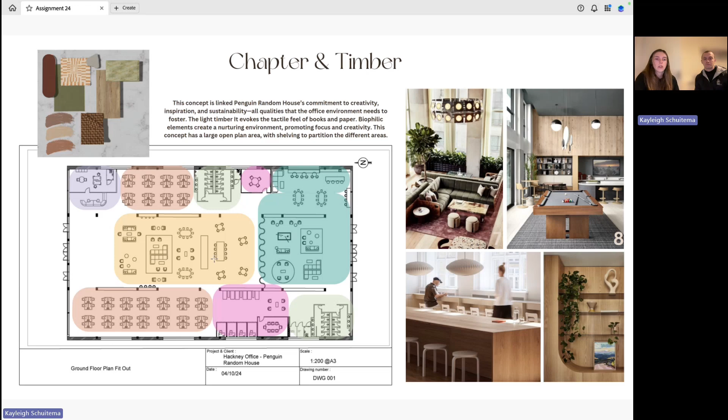Here you'll see the floor plan, and we've zoned it into different colors, making it really easy to identify what is what. We've got quite a few different areas. We've got a lot of desks, which you'll see in the orange zones. This is for sort of individual working. Obviously, we know that the office is not at full capacity all the time, but this is handy to have for people that do like to sit at a desk and work, and have a little bit more stability.

As you come through the entrance, you've got quite a big area of more comfortable lower seating, different groups. This provides different areas for people to work. You've got reception desk and back of house in the purple zone. You've got obviously two big groups of your WCs, some storage cupboards as well. You have got meeting rooms. So we've got two meeting rooms, one over here in the pink and the other one at the bottom.

You've got some working booths as well as some Zoom booths. So this provides really great acoustics. So for people who want to take phone calls or have a little private conversation, they can go into these, as well as the meeting rooms will be more fitted with acoustics for sound quality.

Then this big sort of turquoise square here would be your canteen area, as well as a little recreational zone. We thought this might be nice, as Penguin Random House really wants to foster teamwork and collaboration. We thought this would be a nice area to get people involved with each other, sort of on lunch breaks, etc. And we've divided this with the curtain so that you can obviously block it off, avoid sound, etc.

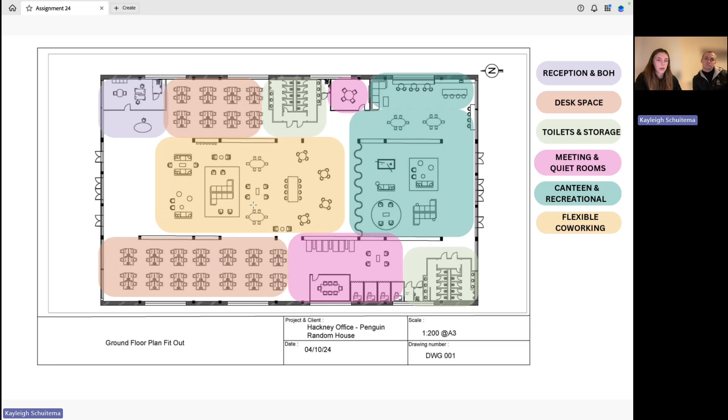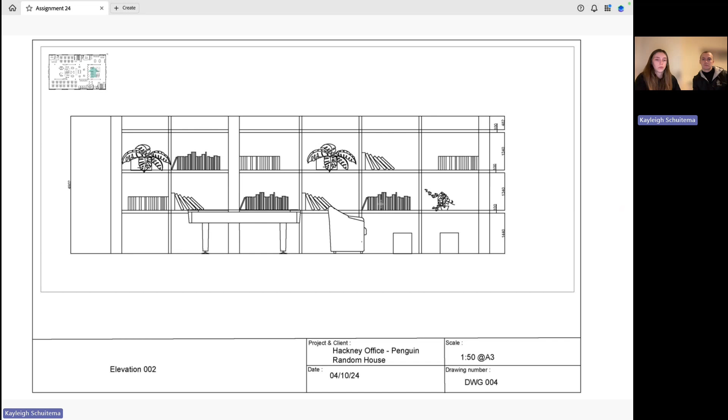This is just an elevation of one of your spaces. Here you'll see your pool table. We've created these really nice shelves out of the existing podiums here. And within these shelves, they're just a nice space to accessorize, put some plants, books, maybe awards, trophies, or sort of prints, whatever you like. These shelves create a really homely feel within them.

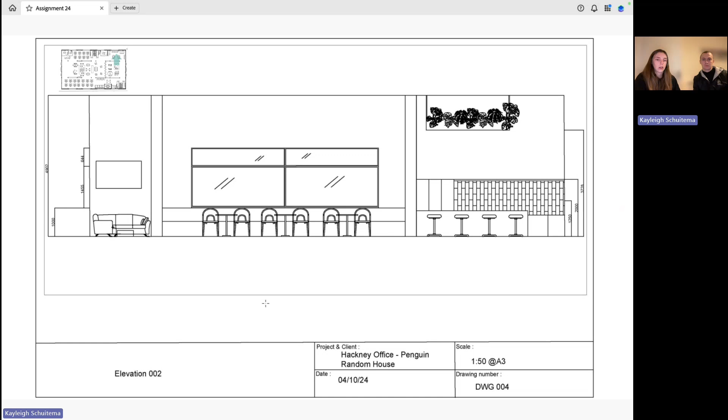This is another elevation of the canteen area. So here you can see quite clearly your kitchen area. You've got an island with some bar stools. You've got seating over here, some tables right next to some nice open lighting. You've got a sofa here with your TV, and then directly opposite this would be your recreational area. So they are quite linked.

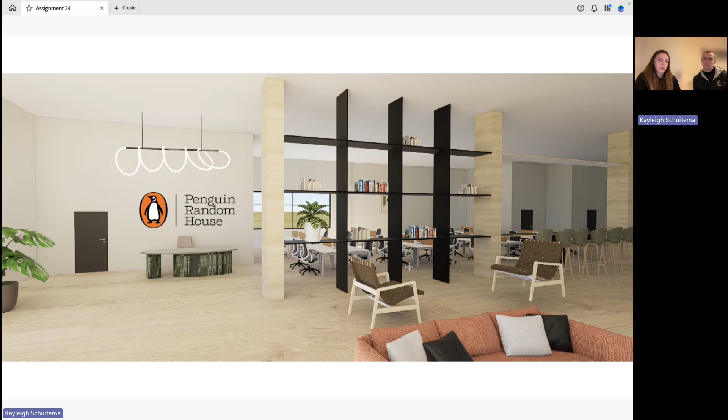As you would walk through, you've got a lot of the low-level seating on this side in the middle, some comfortable lounge chairs, some integrated joinery for bar stools, and then on either side you've obviously got your more set-up office area with all the desks.

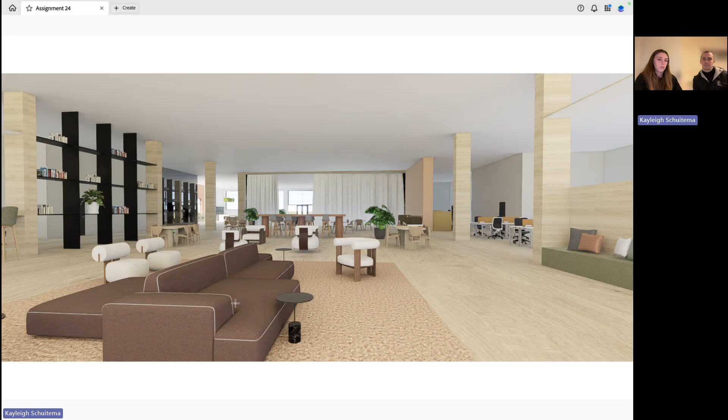This is another view, so you can see the desks on that side. We've also tried to integrate some seating into the joinery, so we've made some benches throughout, put some comfortable cushions and that on there as well. These nice low sofas encourage a lot of interaction because they don't block off too much, so they're quite nice for big groups or more informal settings.

So this would be your view from the other side, looking into sort of the entrance space and just looking at all the different seating groups that are made up. We've tried to incorporate some tables and chairs as well so that people aren't just sitting on low seating, they can also work from tables and chairs instead of their desks.

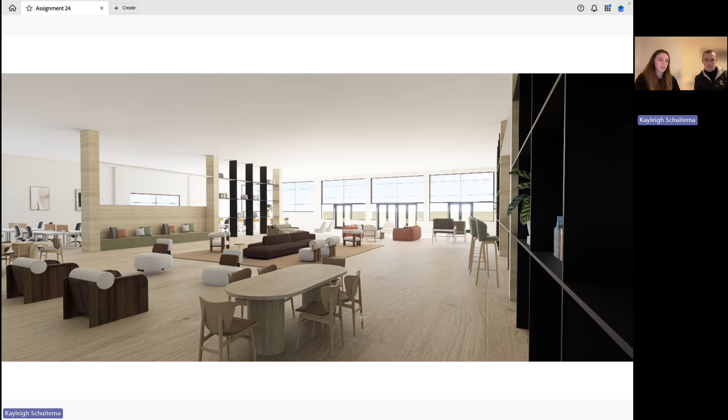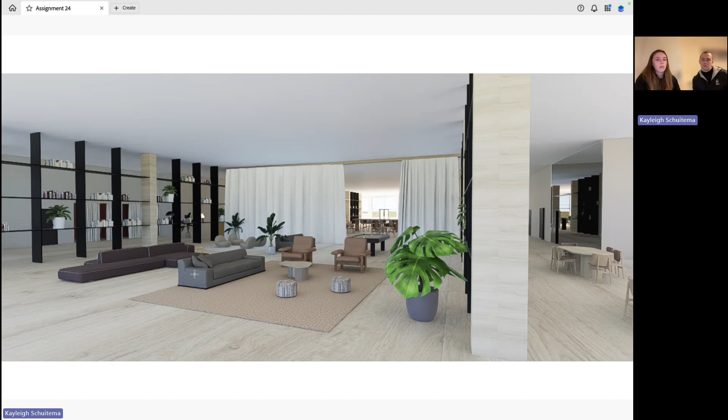This is your recreational area. So again, you've got some really comfortable, more modular, so these stools sort of can be moved around, some seating, and then you've got your pool table there. Creates quite a nice environment for people working in the office to have a lunch break and have this little space to relax.